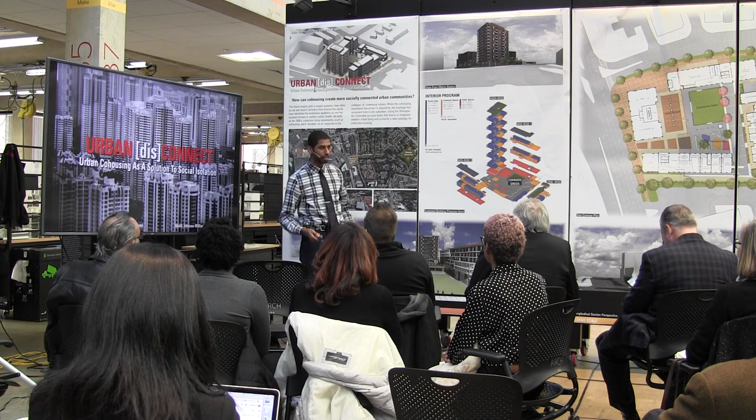So the agenda for today is really simple, four parts. First, we're going to begin with an introduction and brief information about the theory behind the project. Then we'll transition into what is urban co-housing and how we can achieve it. Then we'll move on to a case study, where we take the principles of urban co-housing and apply them in a real context. And then we'll conclude with a brief virtual tour and presentation of a day in the life of residents, and open it up for further discussion and questions.

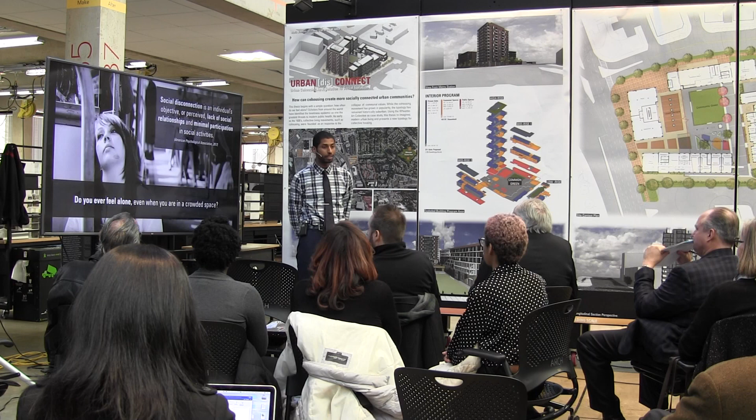This thesis started off with an idea, a feeling, a question: how often do we feel alone, even disconnected from others? This feeling is something that for many of us is a fairly common experience, so much so that over the last decade, numerous publications from scholars and researchers around the world have indicated that loneliness is not just a feeling we have, it's an actual epidemic.

Vivek Murthy, former Surgeon General, identified it as one of the greatest issues to public health in America. The American Psychological Association says that it's even worse than obesity. But this issue isn't just a health implication, it is a sign of a greater issue.

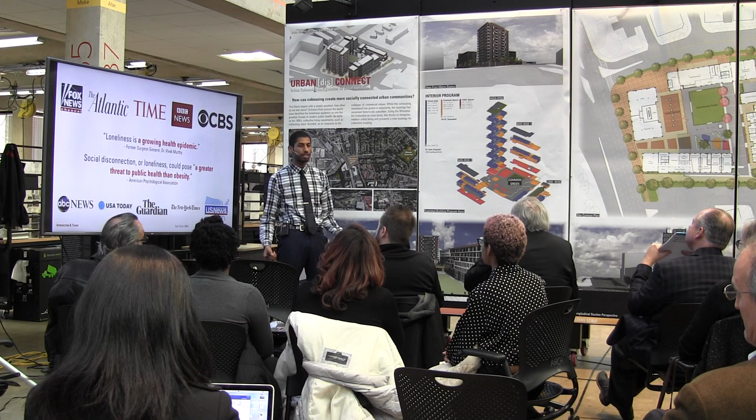That greater issue is the collapse of community around the world. Robert Putnam talks about this in his book, Bowling Alone: The Collapse of Community and the Revival of American Society. He identifies the decline of civic participation and social engagement as one of the key features in that.

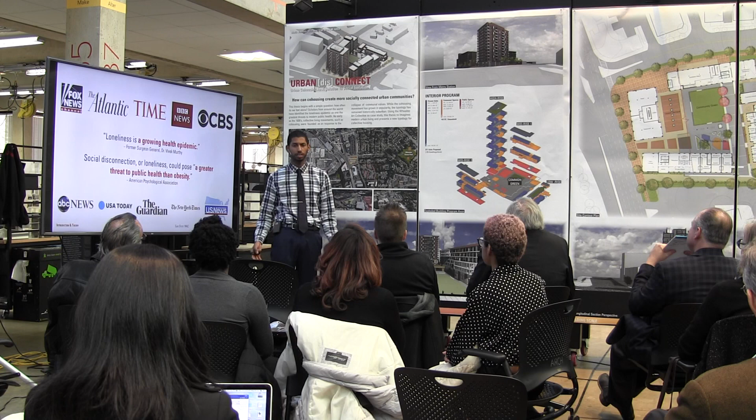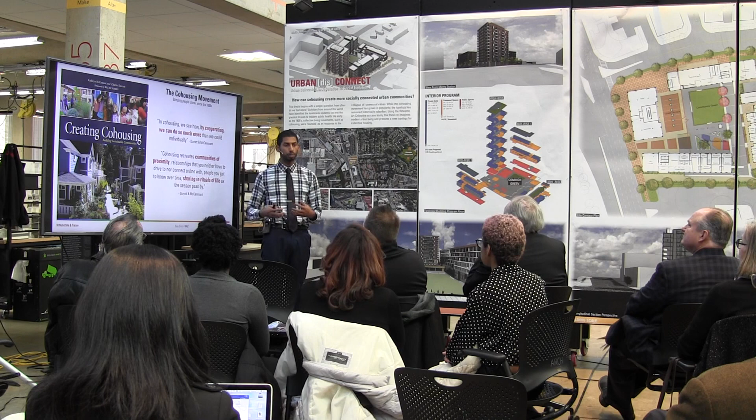Now, all this is to say, it sounds pretty bleak, but there's hope. As early as the 1960s, the Danes had a wonderful idea called co-housing, a social movement gathered around bringing people together and creating a community life focused on interaction and engagement, giving up on traditional ideas of privacy and individual ownership, but thinking about a way that individuals can relate to one another in a more sustainable and communal way.

So what does co-housing look like? On the board here we have two images. On the left, the first generation of co-housing, more reminiscent of co-housing's beginnings in the early 1960s, and then co-housing a little bit after it's been transported around the world.

The key elements we can take away is that co-housing is a collective organization of private households. We can see each home has its own character and maintains its own identity and unique elements. However, it's all part of a complete package and a collage of different community.

The center focus of the project, and what makes it uniquely co-housing, is the common house, which is the center for community life. The common house is a community-owned building, a place where residents come and enjoy each other.

Inside common houses, we find programs such as communal kitchens, communal living and dining rooms that share dinners and lunch, community offices, shared gyms, tool shops so individuals don't have to have 40 lawnmowers for 40 houses.

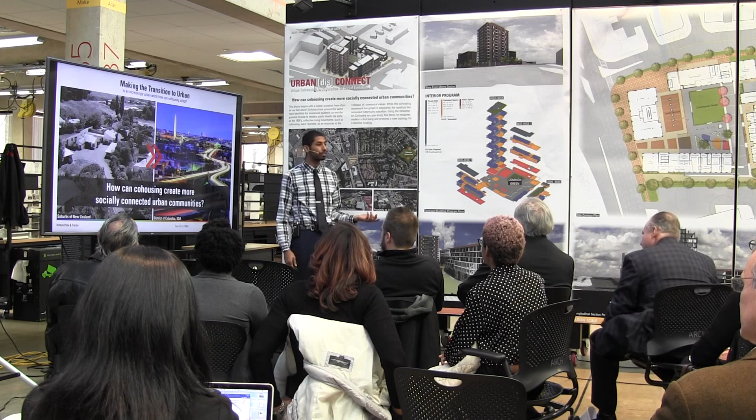First, we have to look at the community scale. How can we make communities that are sustainable environmentally, economically, but also socially? How do we get individuals to feel like they're a part of something, even when there might not be anything there at the time? How do we create community?

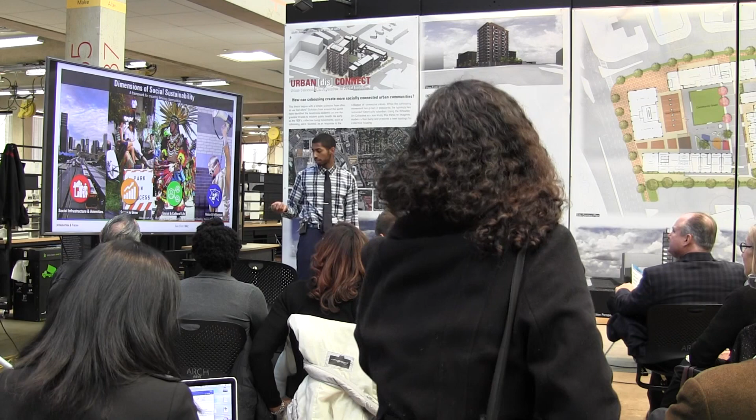Space to grow: as communities change over time, the built environment must adapt to the needs and uses that are most important. And social and cultural life.

A community has to have its own identity while also being able to allow others to come in and create opportunities for change and interaction.

And then lastly, voice and influence: how can communities allow residents to make changes to their own landscape and express themselves?

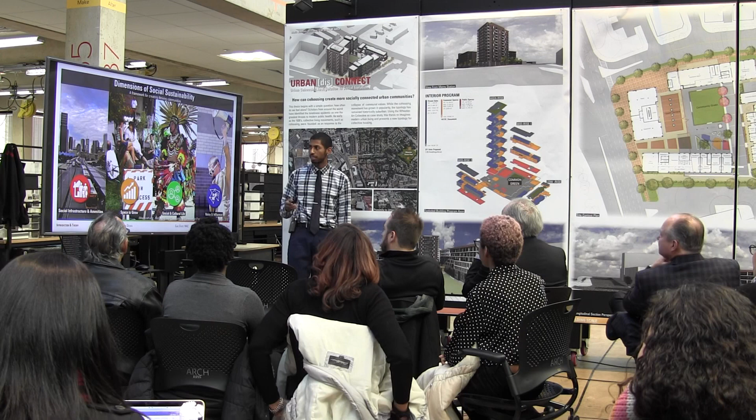With these four dimensions of social sustainability, we can then decipher them into a number of principles, based off of my own literature review, as well as my own time studying cohousing locally in Maryland.

Of these principles I've outlined here in the center, we can see a number of them, such as proximity to goods and services, balance in public-private space, as well as accessibility and connectivity.

We can then translate those into architectural and physical and spatial outcomes. The main five being a central common house where individuals can interact,

pedestrian streets that have high visibility and allow users to pass and interact with each other, a common green space for individuals to gather, collect, engage and organize, and then a mixture of unit types and tenure to increase diversity and allow for a variety of uses and housing.

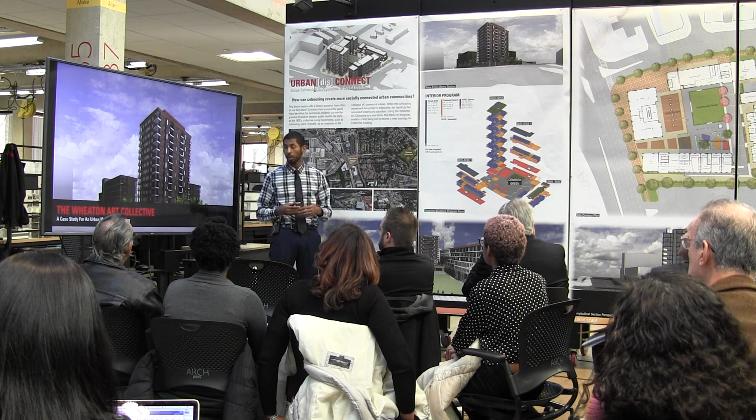Now we're going to move on to the third part of the presentation, where I'm going to introduce you to the case study: the Wheaton Art Collective.

For those of you who are not familiar, Wheaton is about 9.3 miles from right here in the architecture building. It's north of Silver Spring, Maryland, and about a 10-15 minute drive from the DC borderline.

Wheaton, the central business district, is identified here, but I'm going to be focusing mostly on the city of Wheaton, where we have the Wheaton metro station, red line for you locals.

As we zoom into the city, we can see that the central business district, essentially outlined by the black line, is comprised of a pretty interesting mix of commercial as well as residential and retail spaces.

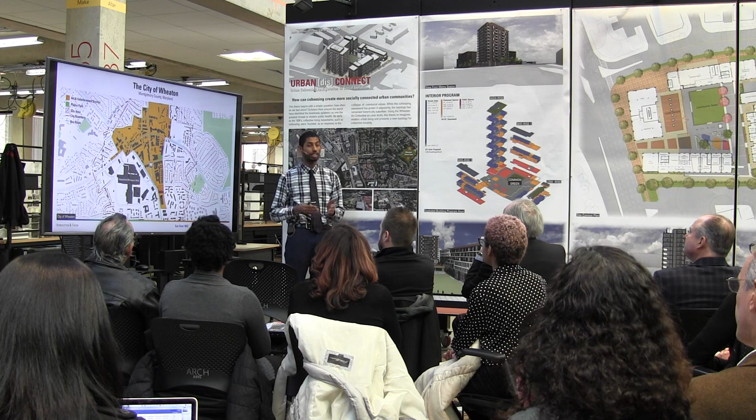Most importantly to note is that Wheaton is one of 2 cities in Montgomery County, Maryland, one of 115 in the state, designated as an arts and entertainment district, which means it gets certain benefits from the state for projects that capitalize on arts and entertainment ventures.

Our site is located here in the red dashed area, a block away from the existing metro station.

Lastly, to note, we can also see in Wheaton that there is a stark lack of green public spaces. Most of the major spaces lie on the outside, with a very small portion right north of the metro station, currently next to a parking garage.

One of the greatest elements of Wheaton is that it is truly a multicultural metropolis, housing a diverse population of individuals and many assets in many forms.

The median age is about 36, so it's a fairly young city, but it has many households, about 3.2 persons per average household. We can see some of the building typologies in this graph, both native and foreign-born residents.

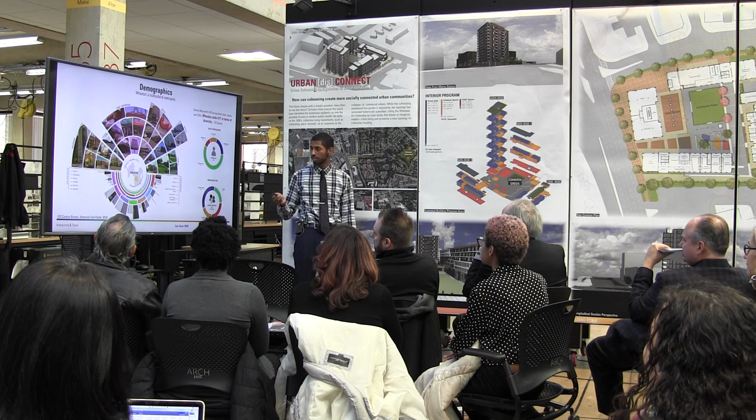Moving from Georgia Avenue on the west to Amherst Avenue on the east, there's a notable drop, 26 feet of grade change over 200 feet. So that's important to know.

One of the biggest things about this project is that this site is directly at the transition point between the growing urban center of Wheaton and the residential community. So when looking at this design, we have to think about how this project relates both to the urban center and the community growing there, to the existing residential neighborhood, and how we can adapt and change as the city continues to grow.

At the current state, as of 2012, this site is slotted for an FAR of 5 out of 92,000 square feet. That's an allotted 460,000 square feet of density and a height limit of 150. So you can get a sense from how the planning department is looking at this site that the city is intended to grow, and quite fast actually.

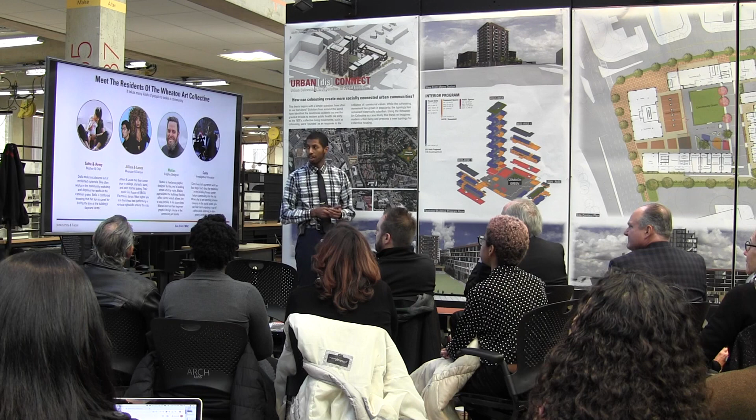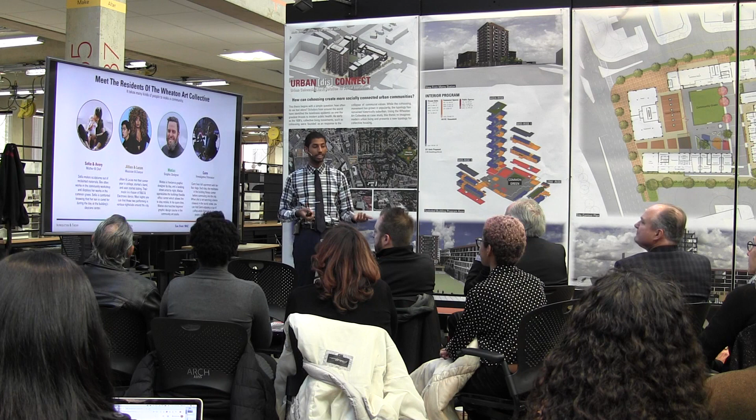Now let's meet some of the residents of the Wheaton Art Collective. On the left, we have Sofia and Avery. Sofia is a mother and a chef who works at a local bakery, while her son stays at the community daycare where he does arts and crafts. Jillian and Lucas are a couple who are musicians and aspiring superstars. They love Wheaton because of the nightlife.

Mateo is a graphic designer. He does work for Georgetown University, and also teaches a graphic design class for residents on weekends. And then Cami is an investigative journalist who works in DC, and she also has 4 dogs and she loves it.

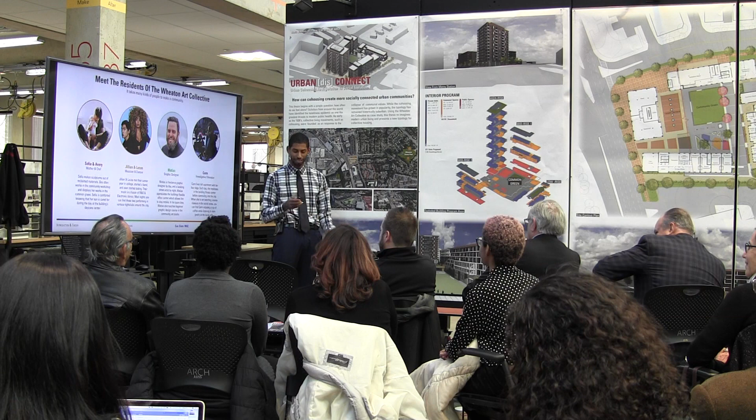So this is the Wheaton Art Collective. Certain things to note: it's a composition of 4 individual buildings, part of an entire complex. One 16-story high-rise tower, 2 7-story mid-rise buildings, and a 4-story 2-over-2 garden apartment. Together they form a central courtyard, which creates the true public realm, fronted on 4 sides, with a new pedestrian street introduced along the boundary line of the existing property.

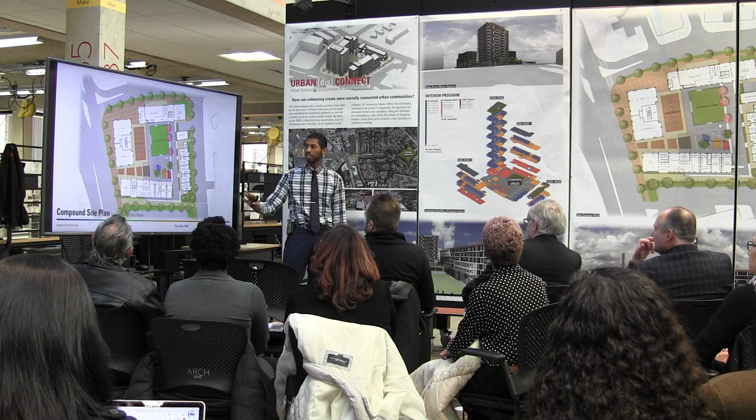So this is the site plan, and some interesting notes about it. It's a combined site plan, a composition of the ground planes at 2 levels as well as the central space. If we look at my modestly sized plan, the portion here is at the plus 26 foot grade, which directly relates to Georgia Avenue running north-south.

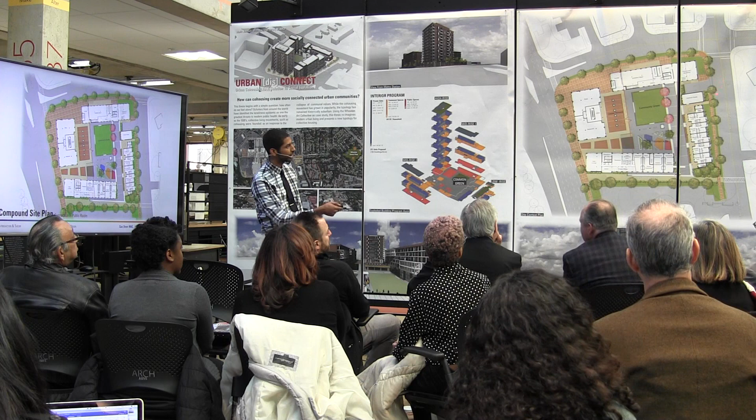On the sides, it comes down to 26 feet, and we're at 0 where we have the low rise, and the low rise meets there. Everything in the center, in this gray zone, is 16 feet below that. So it's plus 26, 10, 0 as we go across the site from west to east.

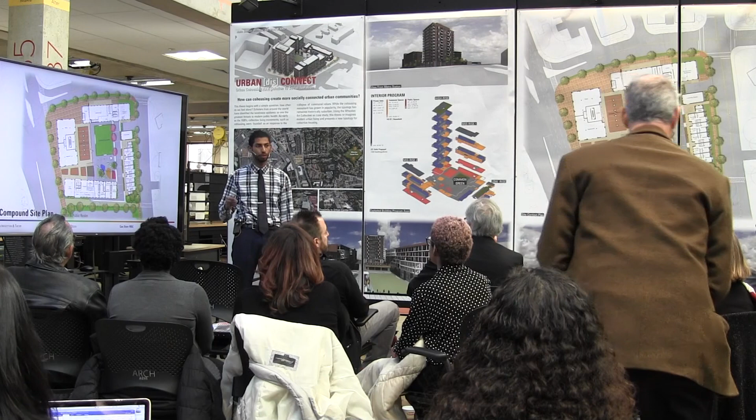Now we're going to go through the individual floor plans after we talk about the program itself. As I mentioned, the program is stacked vertically with commercial and retail at the bottom, then community spaces and some larger public areas wrapped around the center common space, and moving upwards, residential above the 3rd floor.

So we start here at the garage level, at level 0. This is the first level where the low-rise residential directly relates out to the public street. You can enter from the garage on the lower half and pull directly into your low-rise apartment, or if you're in one of the mid-rises or the tower, you can go up through the stairwell, or there's a center elevator that brings you up to the central plaza level.

This is the lower plaza level at 10 feet above grade from Amherst Avenue. Those garden apartments that started on the ground floor now enter out and have their front porches that directly relate to the courtyard and plaza.

On the north side, we have an exhibit space and a tool shop, a community workshop where resident artists can exhibit their own works, as well as hold public events and public gallery showings, but also can work in the tool shop and work on their next craft and their next project.

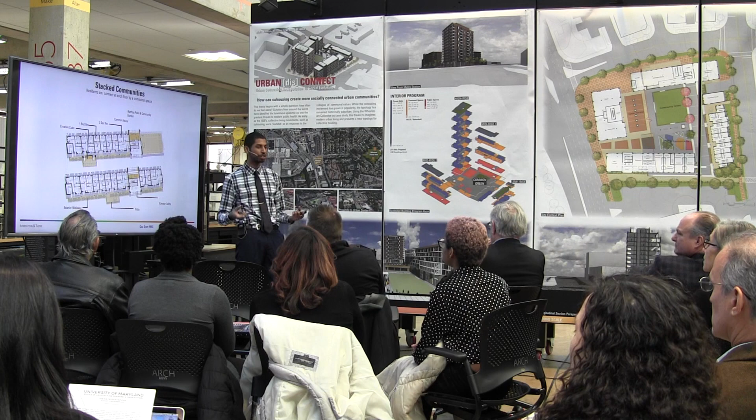At the very end, we see a smaller space, the creative cube, where you can just sit and have popcorn and watch a movie, or even just enjoy their own time.

So I talked a lot about community, and I know for some of us, we really want to know: Malik, you're giving out so much community space, how are we making money? We have to sell units to make money.

So we do this by rethinking our priorities. In cohousing, the community has to rank as most important. So what we do is, by downsizing some of the private amenities, we give square footage over to the public—to the communal resources.

These residents are looking for more interaction, so they'll take an efficiency unit, or maybe a smaller apartment where they don't need a full-size kitchen—maybe a smaller kitchenette and a modest living space, because they know they can go down the hall to the common house and share with friends, with the super 96-inch television and the pool table, or more variety, so they're reducing their own size.

So everywhere throughout the program, we are reducing private spaces while increasing public spaces. And then last, we're going to the virtual tour.

Here's that view from the common spaces from the tower. We can see residents engaging at breakfast time, having some mimosas, looking out onto the public courtyard space, reading the newspaper, having their cup of coffee.

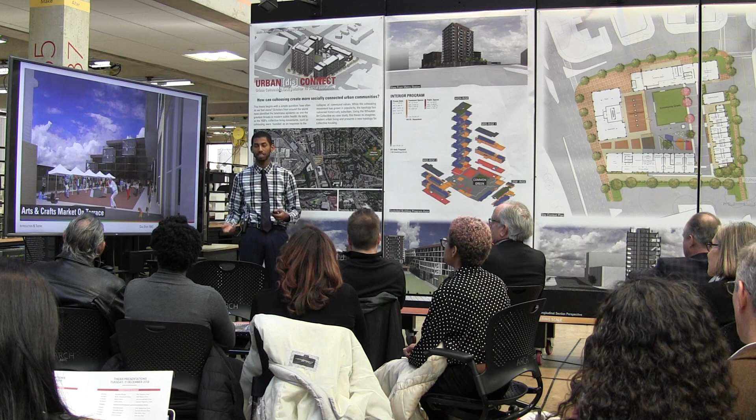Downstairs on the terrace, we have an arts and crafts festival where residents are sharing their goods and selling them to the local community, and people are outside enjoying and walking their dogs.

Up here in the Creative Cube, we have a group of residents who are preparing for their next gig downtown, just doing some little practice recording.

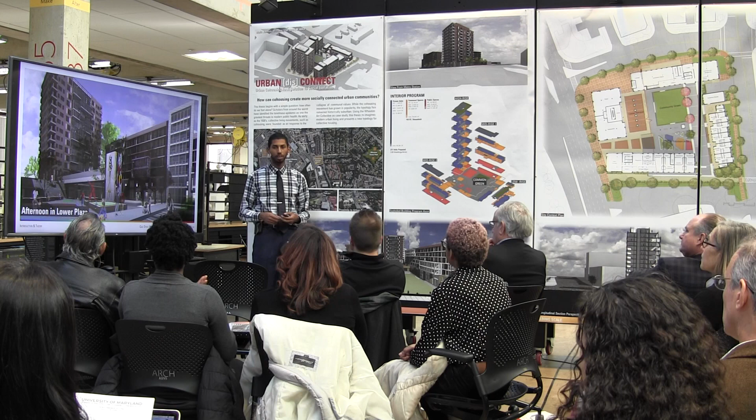Here in the lower plaza, we can see residents enjoying the wonderful public space, whether that's frisbee on the green lawn, or running through the fountain area, the fountain sculpture garden.

And then a small jazz concert where artists are going out and performing and actually taking advantage of the space and using it, whether it's just for enjoyment or maybe to make a quick dollar.

And then lastly, a game night in a multi-purpose room, really inviting the community from all of the complex and even the greater Wheaton community to come down and enjoy time together and share in interaction.

So as I stated before in the very beginning, to make a socially sustainable community, you really have to have 4 elements: social infrastructure, the space to grow, a strong social and cultural life, and an ability to influence and change the space.

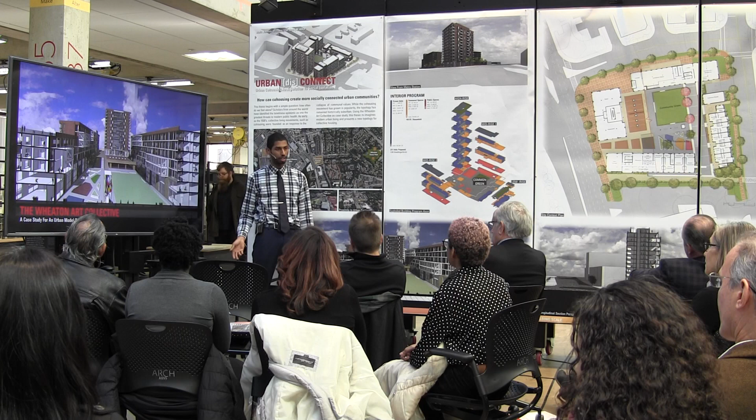In all these ways, we've done that architecturally, whether it's the creative cube that allows you to adapt the space for whatever you need, or a large community green to hold community events and have community concerts.

Being directly located to public transit and having the resources allows you to have the type of easy, comfortable lifestyle that you want, or having a connection through open walkways where you have visual relation with everyone else.

We've done all these things, and now we've created a community that's really active, vibrant, and socially engaged. Before I open it up to continue discussion, I'd like to just quickly go through the boards and tell you how I've laid them out.

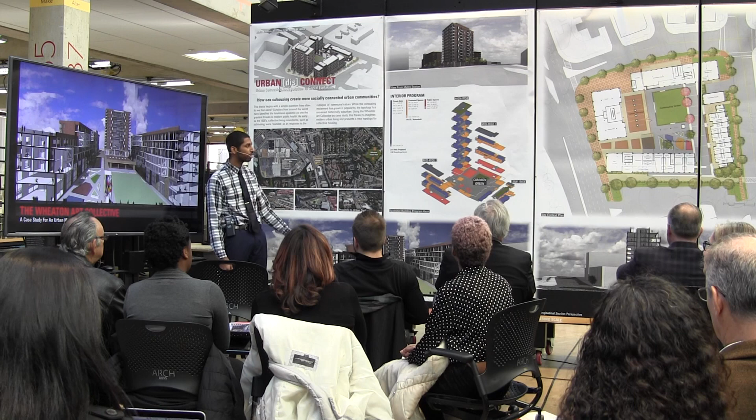We have the community scale on the first two panels, then the building scale, and then lastly the human scale. I think we can understand how you break it down. Thank you. I want to give the panel... Yep, and so now I'd like to open up to the panel.

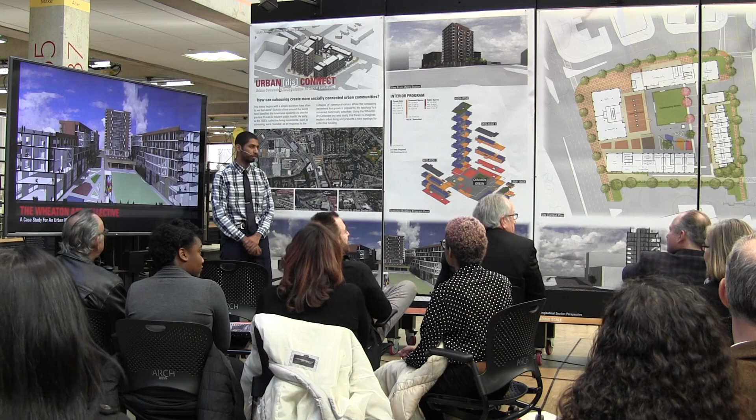Malik, this is a terrific project. Wheaton needs it. Wheaton is struggling to become a place, as you know. And we have plenty of experts who are going to talk about the relationship between unit size and collective space, which is happening naturally anyway with micro units and so on, but which you've articulated, I think, quite nicely here.

My question is this: altogether, this adds up to a community itself, a bigger community, so it's a scalar breakdown. The only community space that I could detect was called a game room, I think. Do you see a place here for the entire community, the collection of co-housing communities, to express a collective function of some sort? Self-governance, whatever, because I suspect this will become a condominium, essentially a condominium of the entire thing.

Correct, so that's a wonderful question. When I was designing this project, I was really looking at community at four different scales: the community at the Wheaton greater area, the city of Wheaton, the community within the complex, the community within the building, and then the community within the clusters.

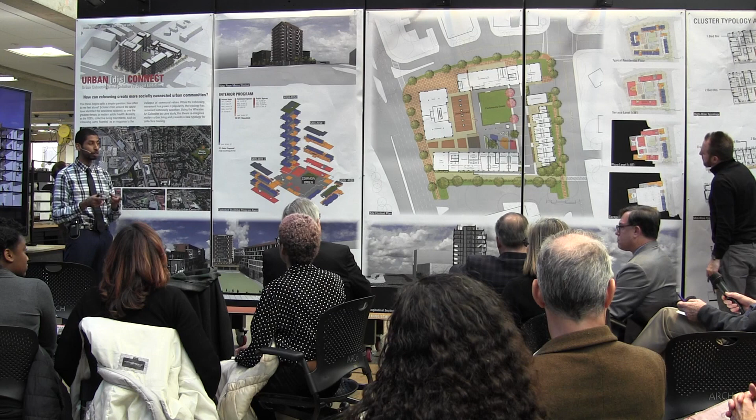At every level I've tried my best to create different levels of community spaces where you can engage. At the large community scale, including Wheaton and the existing surrounding residents, those spaces are mostly a part of the public realm, whether it's the exhibit spaces, the community workshops, vendor spaces, a lot of those ground floor amenities and public retail spaces.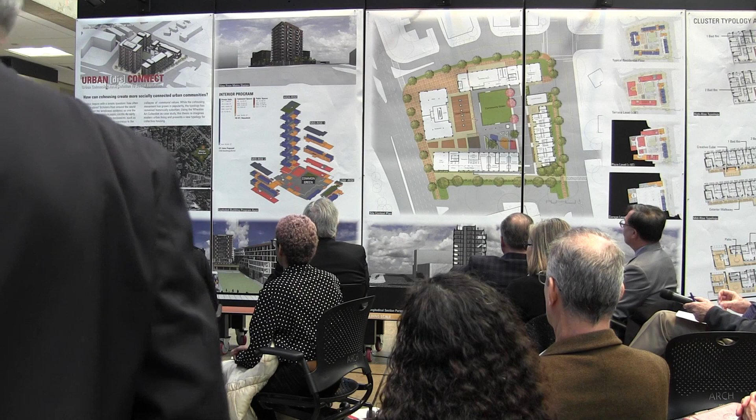So that could be something that's used by the entire four buildings, whether it's to have a giant town hall meeting to talk about the status of Wheaton, or to talk about how everyone needs to make sure that we put all the tools back in the right place, to having, as I mentioned before, even voter registration.

In the actual buildings, we have community spaces, the common houses, and the outdoor terraces. That's for building interaction, and then smaller interactions again are those individual creative cubes. So going through this project, I thought very deeply about the different levels of interaction, going from the individual to the city, and how those places can interact in relation to the courtyard.

Yes, I think excellent work. There's aspects of your project that I find well crafted and well thought out, but at the same time, perhaps because of how well you've crafted something, it sort of leaves you open for some questions. I was actually interested in you defining what community means to you vis-a-vis those demographics of those people that you showed, which are primarily professional people.

I don't see the mother that works at Safeway. I actually grew up in Wheaton around this neighborhood. I don't see the mother with three kids that works at Safeway across the street. How does she fit into this demographic?

You also said it's primarily condominiums, but when you define community, you're looking at a variety of building types. Where does a rental come in? Where does a low income component come in? And how does it all work together?

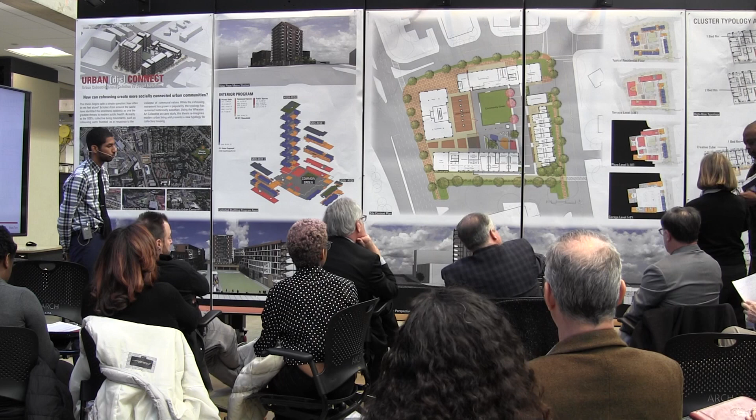This is the first time I've ever had to fight the critics for the microphone.

Malik, you know that when you've inflamed the passions of the critics, you've asked an important question. I think Malik's career is going to be characterized by asking important questions and working together with the professional community to seek answers to those questions. I think Malik is keenly aware of his potential role in reshaping the environment to improve life for people and their communities, and he's prepared for this role well. He studied architecture as an undergraduate and did a dual degree combining architecture with urban and community planning as a graduate student. I think his work reaffirms the value of our dual degrees.

I've had the great pleasure over the last few years to observe and work with Malik on three important projects that showcase his commitment to improving the world for people. The first was React House, where he collaborated with his team, really against great odds, to design and build the University of Maryland's solar decathlon house and take it to victory out in Colorado.